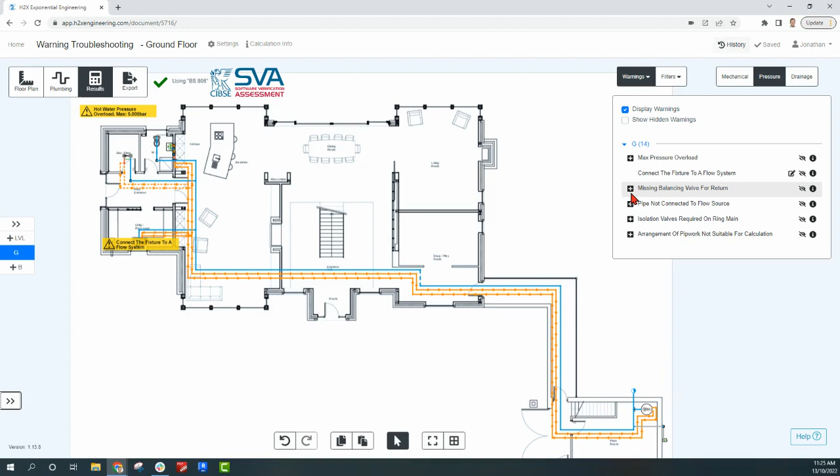So the first thing I just want to say is it can be overwhelming sometimes because, say, for one simple fix of adding a balancer valve, you might get a lot of warnings. So it's important just to work through them one by one. And the best way to do that is if you hover over this information button here, you'll get a very clear description on what the problem is, how to resolve it, and then sometimes you'll even get some more tips as well on alternative ways to resolve it.

And then for some of them, you even get a YouTube video, so you'll get an actual description and an example project on how to fix it. So it's worth reviewing this before you go too far.

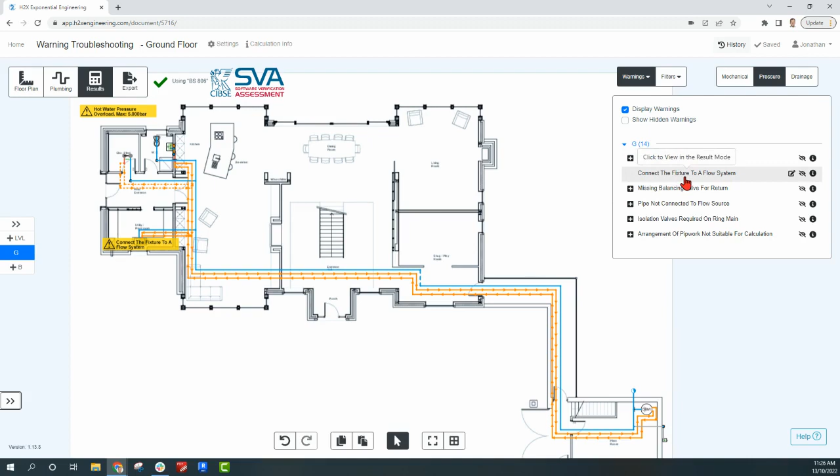And one other tip that we like to give is if you click on the warning, it will take you exactly to that. So if you've got a large project and it's saying that there's a fixture not connected, what we recommend is just zoom in as far as you can anywhere on the project, click on the warning, and it's going to take you exactly to that. So it's really easy to find where the problem is. If we go on this one, for example, if we zoom in and click on this, it's going to take us exactly there.

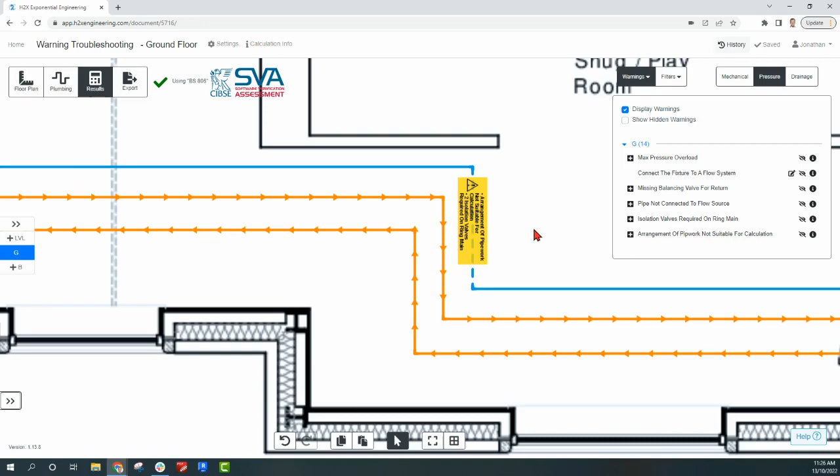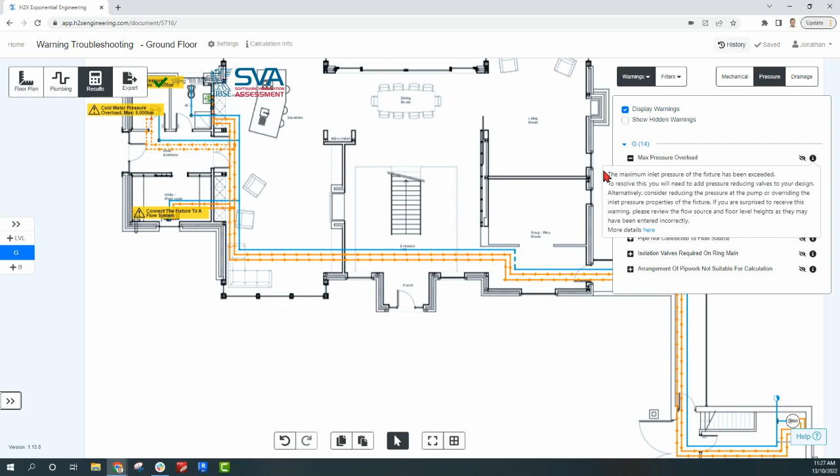So they're the main points to be aware of, and now I'm going to go through some of these warnings and show you how to fix them. So we'll start from the top, maximum pressure overloaded. Pretty simple one. We've got too much pressure coming in, so whether that's from the flow source or because there's a huge pump on the project, what it's telling us to do is to add a pressure reduction valve to the design. So it's up to you where you do this, but let's come back into the plumbing workspace, and I'll just add one to the incoming water supply here.

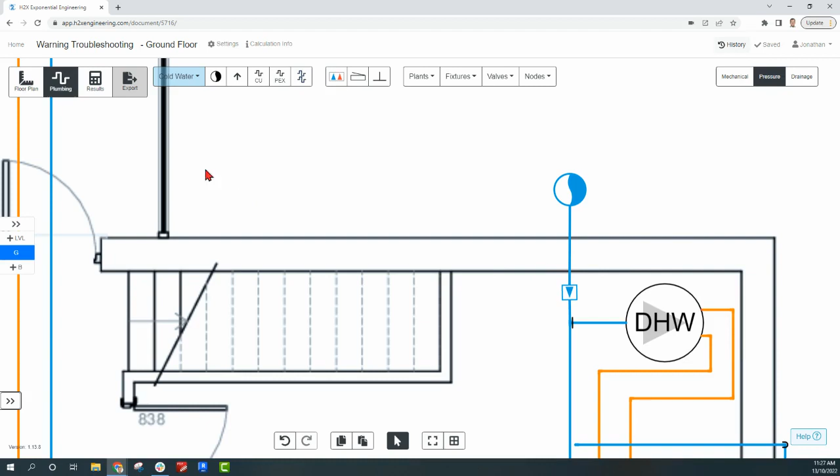So choose the pressure reduction valve, add it onto the design, and make sure to enter the target pressure. So we'll go with 4 bar. Now when you click results, you can see straight away that warning has gone away because now the pressure is not too high in the system.

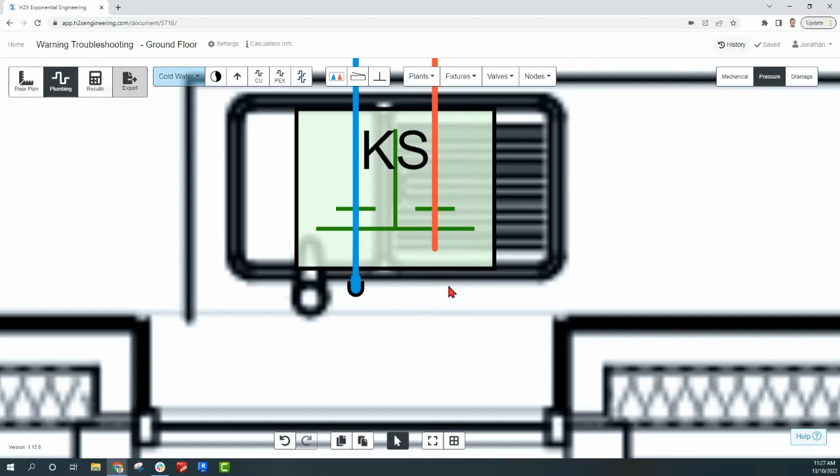On to the next one. So we can see here that although the hot water pipe has come close to the fixture, because we can see this cap, it's not quite connected. So we can just drag that over there and connect that up. Sometimes it doesn't connect because it doesn't allow the systems to connect. So if that was allowing warm water and it said yes, you just need to click yes before making that connection.

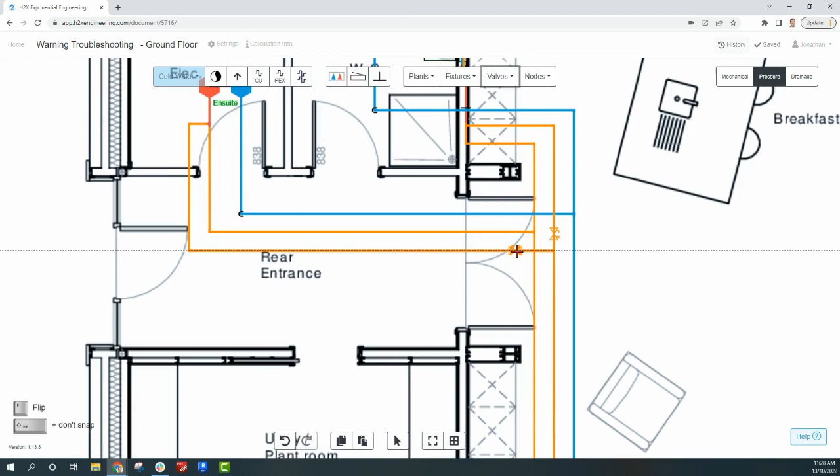Coming back to the results. So the next one's for the balancing valve. It's missing. So that again takes us to this area, and we can clearly see that there is no balancing valve on this. It's been missed. So once again, very easily choose the balancing valve, put it wherever you'd like to, and then as you hit results, the warning goes away.

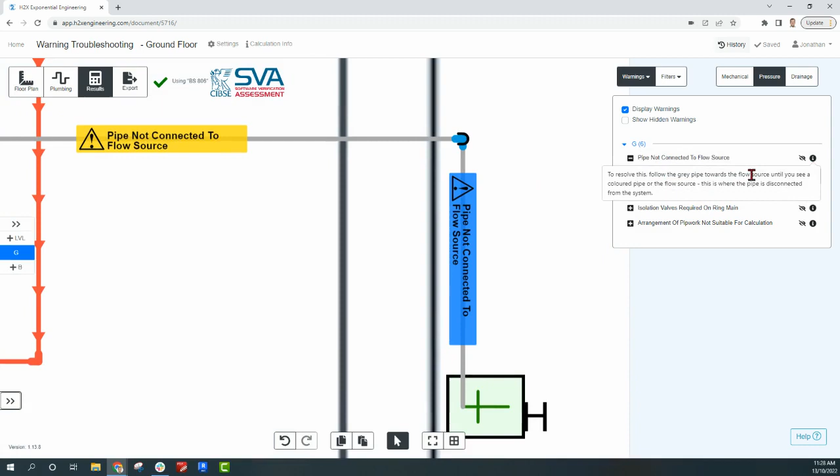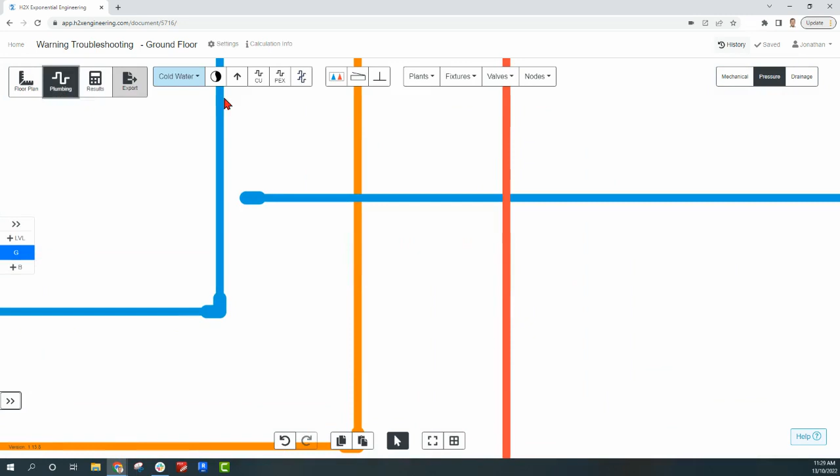All right, for the next ones, let's find out where this is. We'll zoom in. Pipe's not connected to the flow source. So with this one, it tells us follow the grey pipe towards the flow source until you see a coloured pipe, or the flow source, because that's where the disconnection is. So you just want to follow this grey pipe, and as you can see, it's not connected here. Connect that up, click results, and that warning's gone away.

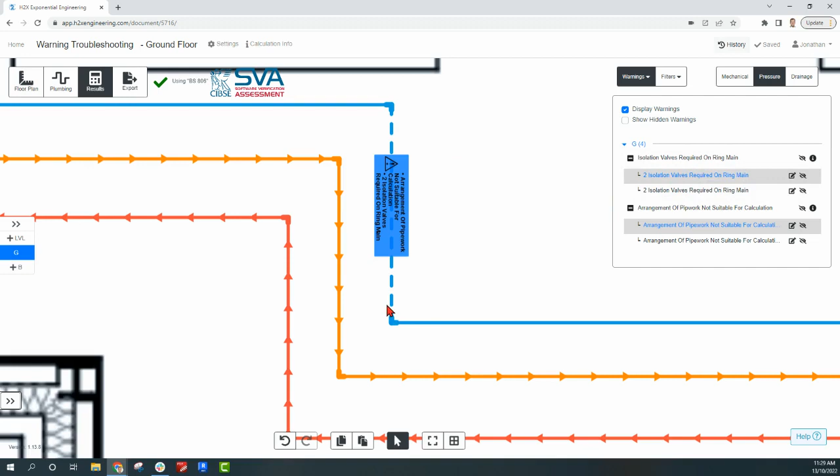And these last ones are actually related together, so if we find out where this is, it's here. Sometimes as you're drawing, you can draw 2 pipes in the same place, or you might accidentally connect things in an order you didn't want to. So if you see something like this, the pipe's dashed because it's created a ring main here when you didn't want one. The best advice I would give here is in an area where you have this, you can right click and drag a box and just delete what's there, because it's usually a mistake with how it's been drawn, and then just redraw what you had.

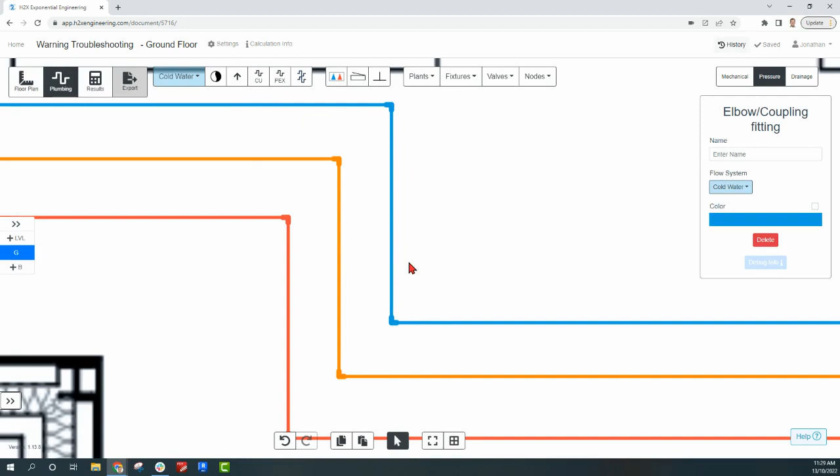So in that example, I'd drawn 2 pipes there for whatever reason, and as I click results, you can see that's gone away. And now there's no warnings, so hopefully that helps.